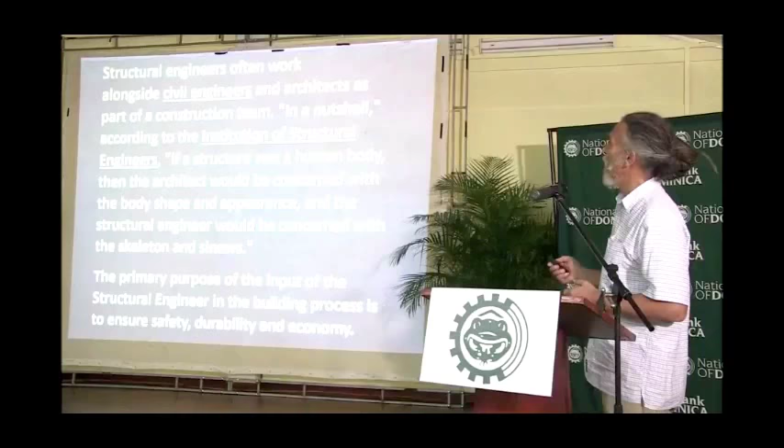So a comparison is given here. If a structure was a human body, the architect would be concerned with the body shape and appearance, and the structural engineer would be concerned with the skeleton, the bones, and the muscles that make the building stand up and withstand whatever push, whatever shove, whatever else comes on it. You don't want the building to fall down. The engineer is the one that will prevent it from doing so.

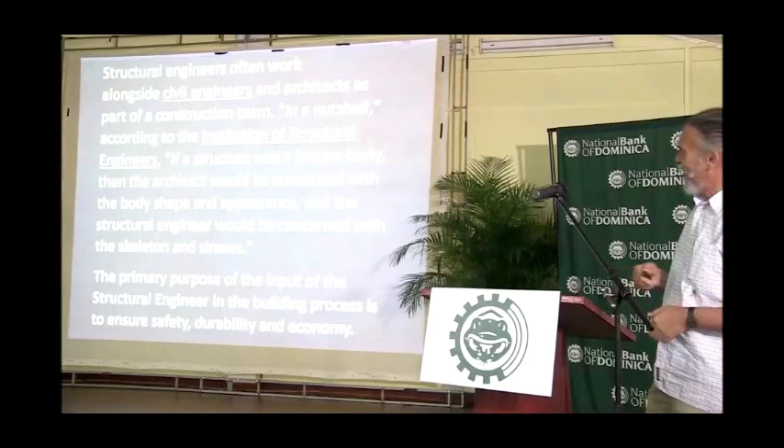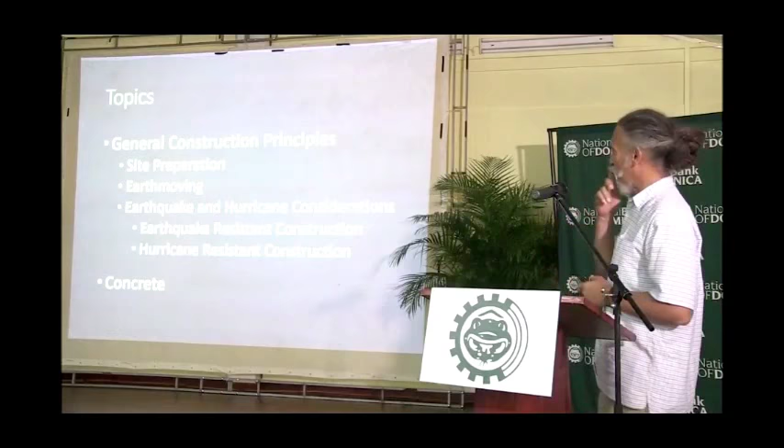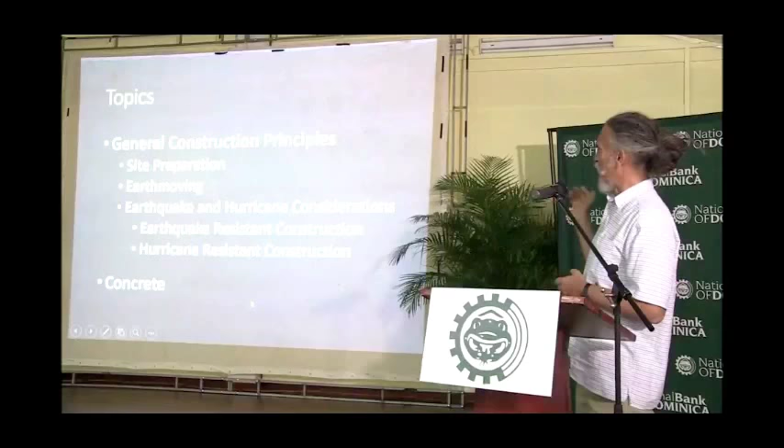Now, in this presentation, time is short, so I will just go through certain topics that engineering is involved in the whole process. We have the site preparation, we have earth movement, we have the considerations for earthquake and hurricane, and we will touch briefly on concrete.

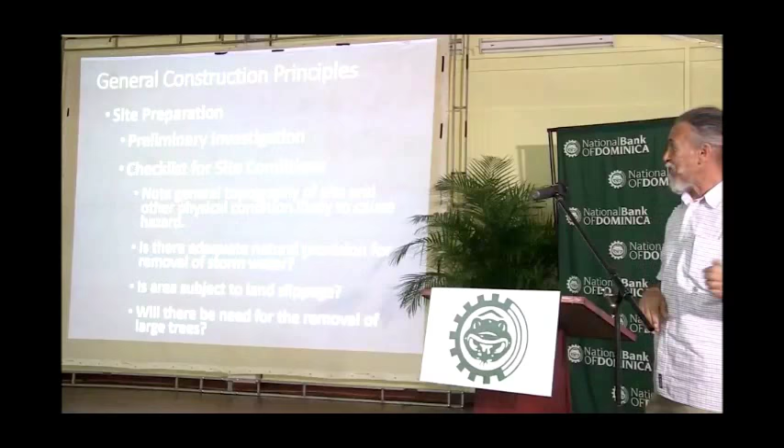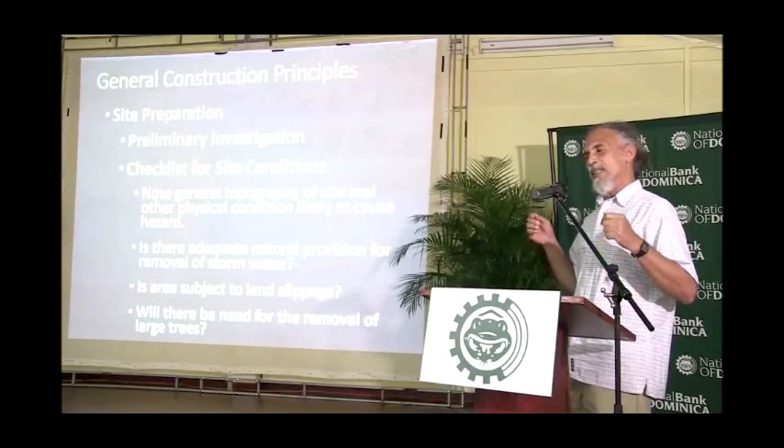Site preparation. Now, usually the engineer or the architect comes into the picture after the land has already been bought. So we have to make do with that situation. When the client is ready to start building the house, he engages his architect. He may not necessarily engage the engineer at that point, but it would be useful to have an engineer look at the site prior to building, or prior to even designing the building, because one has to take into account the nature of the soil.

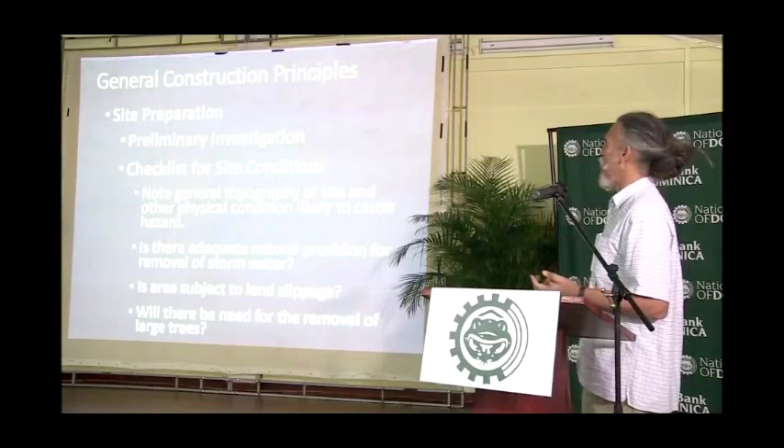...the nature of the topography of the land, whether or not you have any risk in terms of storm water, that is rainwater running through the site, whether or not the soil is strong enough to support a building, whether it requires retaining walls, whether or not the land is prone to slippage.

We also want to find out if it's suitable for septic tank and soak away if it is out of the urban area. We want to know where the land drains to, if that is an issue. So all that impacts upon the design of the building: how big the building shall be, how tall you can go, how wide you can go, as the case may be.

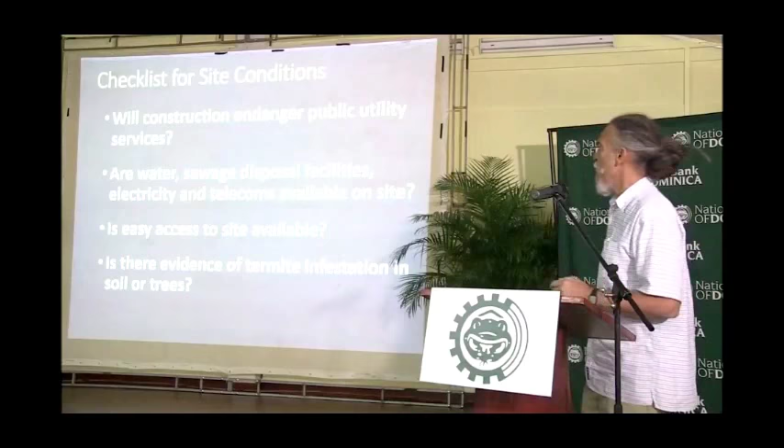We also want to know if you have easy access to the site, if you can drive onto your site, if your vehicle can come and drive underneath your house or next to your house, or if you have to leave it parked by the road. All these things you need to know up front.

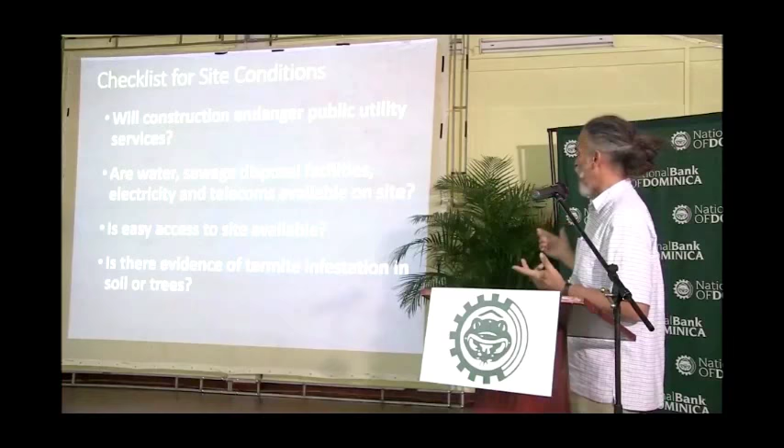Is there any evidence of termite infestation? That is a major problem in all tropical countries. Termites are part of life, but we want to know if there is any evidence of intense infestation within the property. As I say, I'm trying to go through as quickly as possible and touch on all the major points.

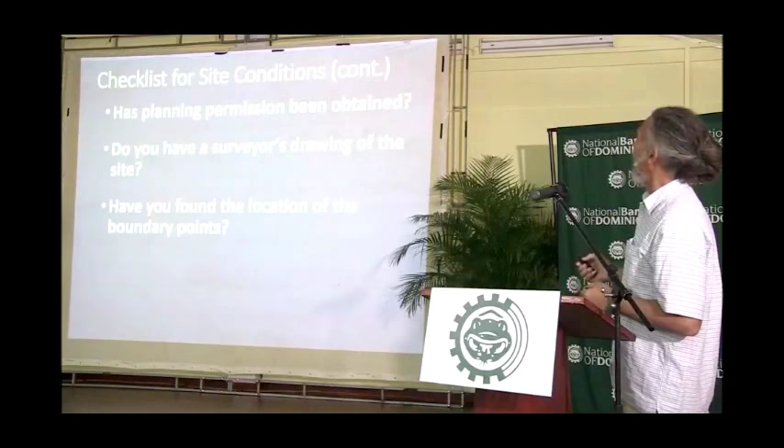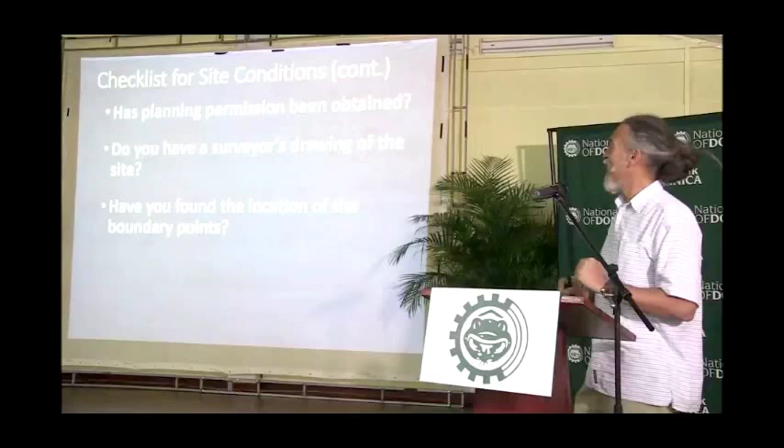Also, if you have a surveyor's drawing of the plan of the property, that's very important to know where the building shall go. And if you're not building on somebody else's land, as has happened in the past, you also want to know where the boundary points are, so the building will go where it is intended. Of course, planning permission should also always be obtained. The bank will require that as part of the documents required for processing the application.

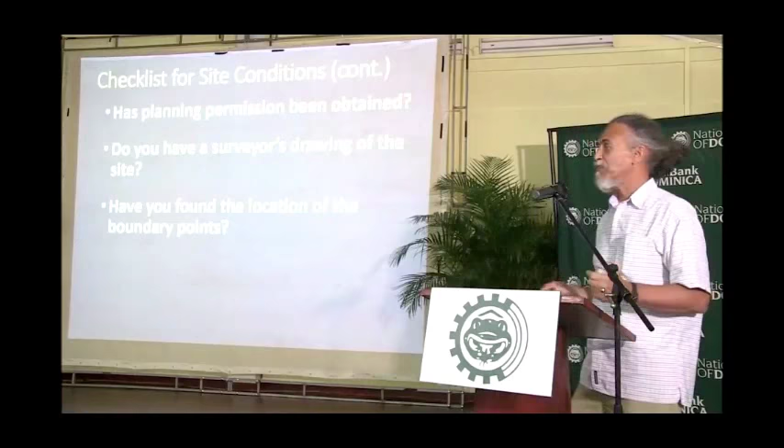Now we have to look at site clearance.

After the plans have been prepared, or during the course of preparation by the architect, there are some situations where the engineer and architect have to work together. Planning has requirements for official collaboration between the engineer and architect. These criteria depend on the size of the building. If the building is more than 3 stories, you require an engineer's certificate. If the spans of the slabs are beyond 13 feet, you require an engineer's certificate. If the span of the beams is beyond 16 feet, they require an engineer's certificate.

But that is just a document required for planning. It does not mean that if it doesn't meet those criteria, you cannot make use of an engineer. An architect or draftsperson is not trained in engineering, or has limited training in engineering. So while they may have the knowledge to make a building safe in terms of design, it may not necessarily be economical. That's where the engineer comes in—he can prepare a structural design that is both safe and economical. That's the important part, because anybody can build a very strong building, but you don't want to spend 100,000 when 50 will do.

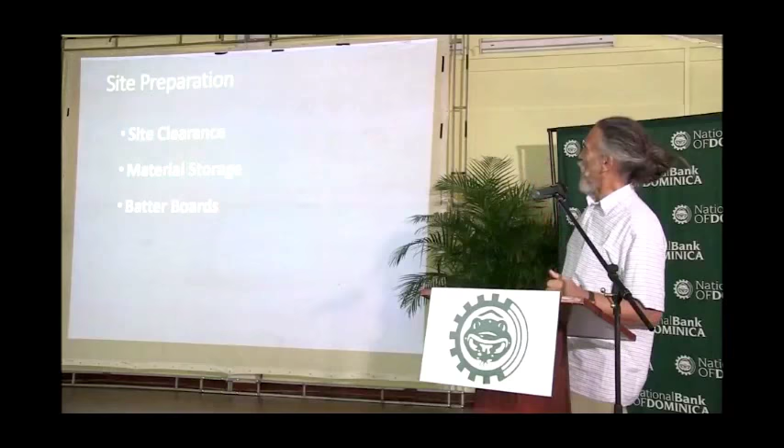So we have excavation. If it's not too deep, we do not need anything to hold up the sides of the soil. If it's deeper than a certain amount, especially in Roseau, you might need things to hold up the soil because it keeps falling in. It all depends on the nature of the soil at the respective site.

Backfilling—after we dig, we have to put back. Particularly for ground floor slabs, which I call a slab on grade, we do not want more than 3 feet of fill underneath that slab. Many times it's quite common practice here that they build the foundation walls, fill up the space, and just compact the top. That is not good practice. To do backfilling properly, you're supposed to fill it in layers and compact each layer as you're coming up.

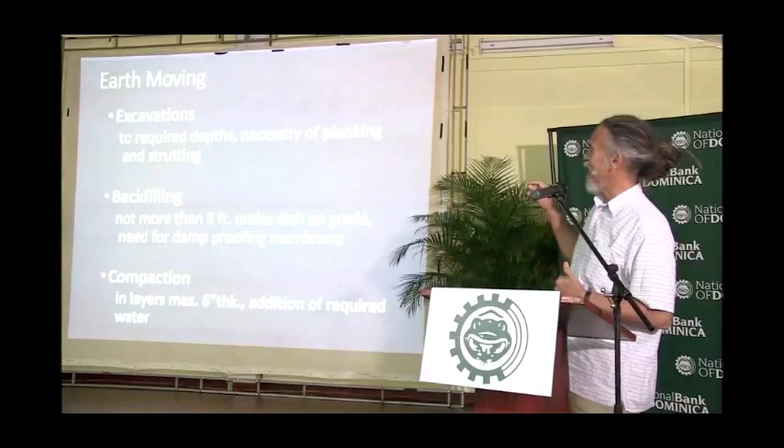Because over time, that more than 3 feet of soil underneath the slab will sink. And because the slab has not been designed to be suspended, it will sound hollow, start to sag, the walls will start to crack, the doors won't be able to close, and you'll get all kinds of problems associated with that. So if you can avoid fills of more than 3 feet, please do, or ask the designer to design your slab as if it were a suspended slab.

That's why I talk about compaction. Soil does not have any strength without compaction. Compaction is a tedious process, but the only way to do it is in layers, maximum 6 inches, compact it well, add water—the correct amount, because too much makes it too soggy, too little and it will never compact enough. This is a very common mistake or shortcoming during construction in this country.

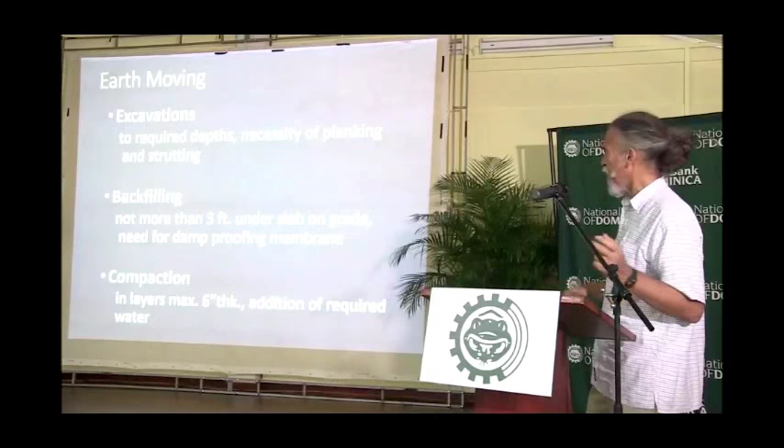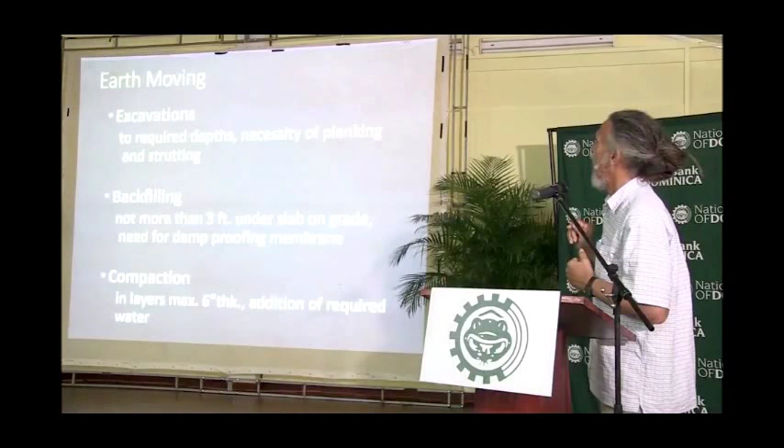Anyway, this part of the world is known as an earthquake zone. I think we missed a couple of slides, anyway. Alright, okay, we'll take it as it is.

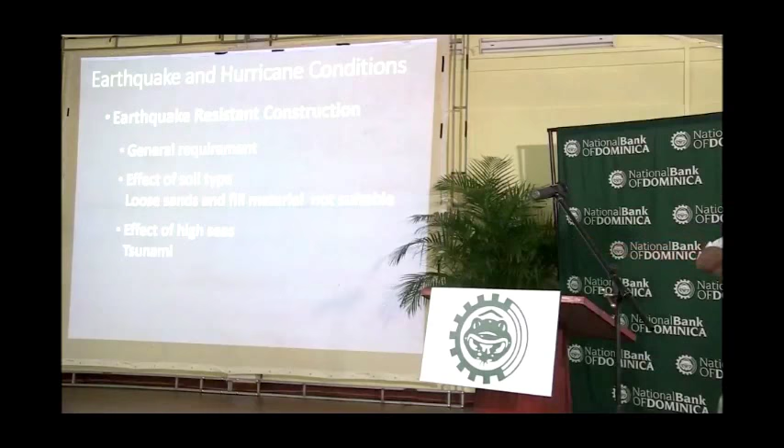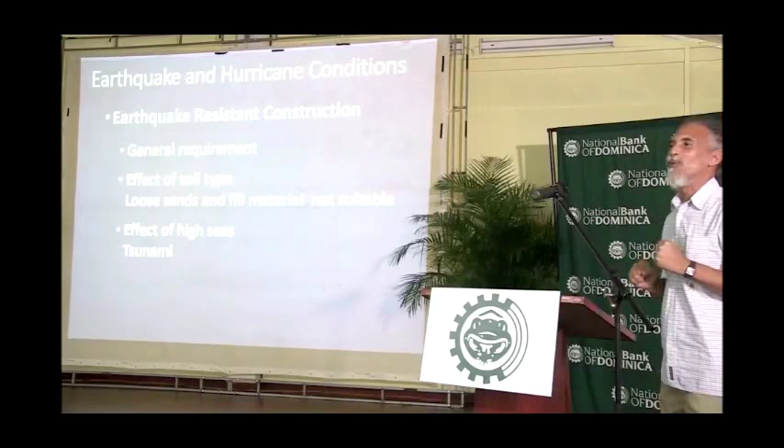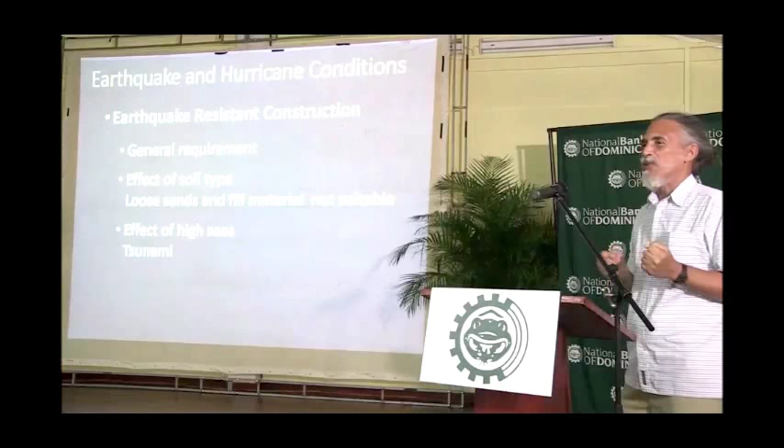Earthquakes involve the shaking of the ground to which the building has to react. This shaking could be both horizontal, in any direction, and at the same time up and down. So it is a difficult thing to design against. Nevertheless, there are certain points that we must bear in mind when looking at making our houses and buildings earthquake resistant.

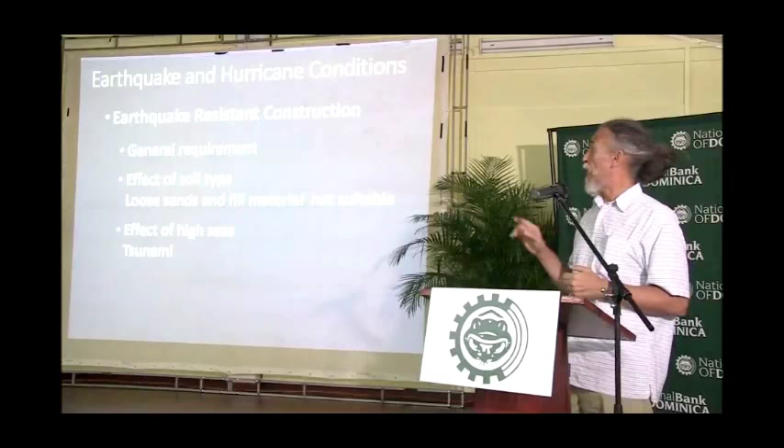Fortunately for us, most residential buildings are one or two floors, and they're not as affected as taller buildings would be. Nevertheless, the type of soil that the building is on is very important. If you have loose material on which the building is placed, the whole building could end up toppling.

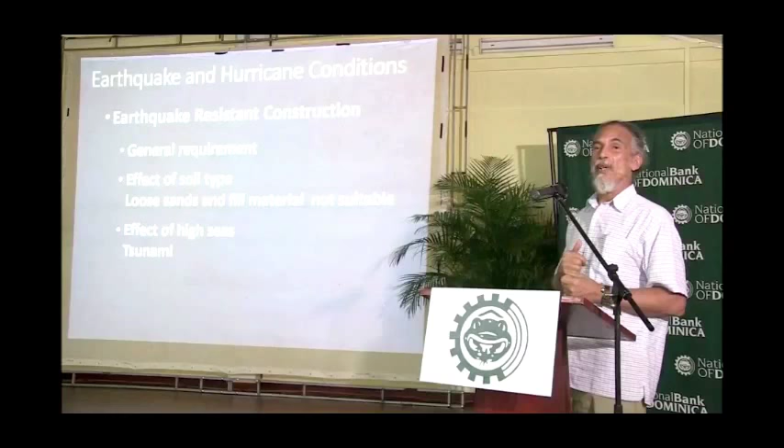Also, if the building is close to the sea, you have the issue of tsunami. Just recently, there was talk about this volcano offshore in Grenada, called Kick 'em Jenny. It has been active for some time now, and it's expected that sooner or later it will explode. When that happens, because it's in the sea, it's quite likely there will be a tsunami generated, and there's no barrier between them in Grenada and Dominica, so it's expected there will be some tsunami effect.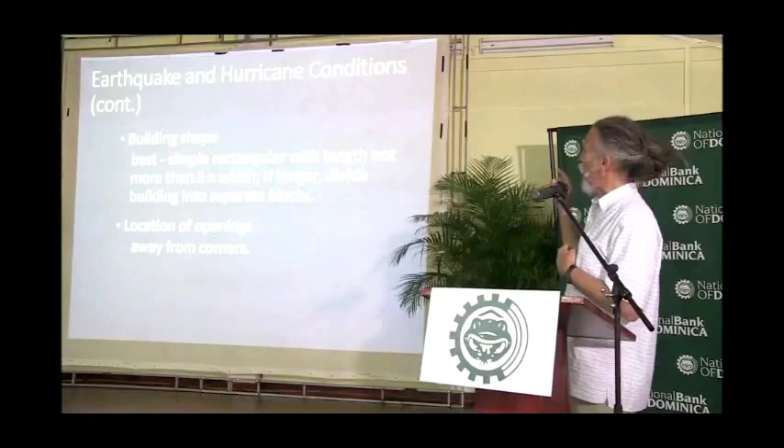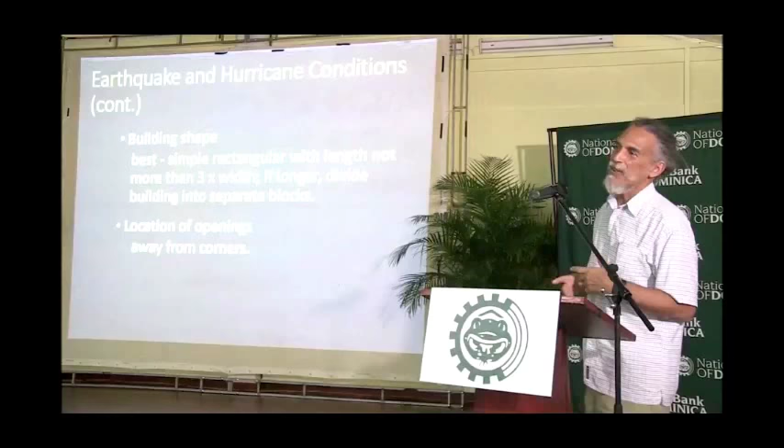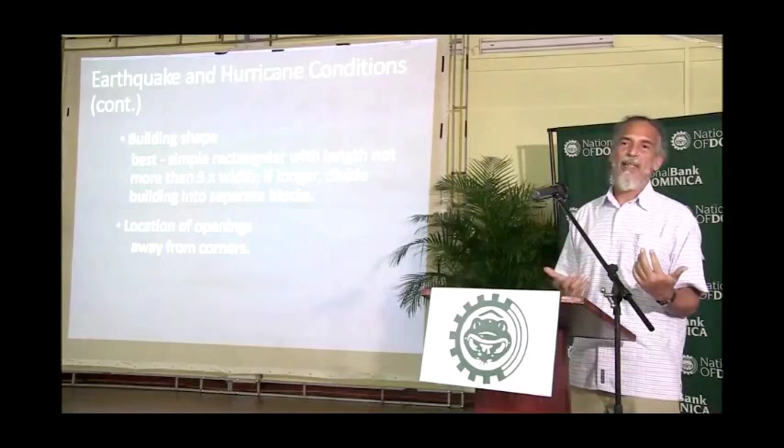Also, the shape of your building is important in terms of how it resists the earthquake. The best shape is a simple rectangular shape with the length not more than three times the width. So if the building is 30 feet wide, it shouldn't be more than 90 feet long. If it's too narrow a building, when the ground shakes, it's more likely that it will have some damage. If it is longer, we've got to divide it up into separate structures, so that with the movement you don't get any kind of damage occurring.

The openings must also be situated away from the corners of the building. Bringing it too close to the corner weakens the building and therefore makes it more susceptible and more vulnerable to earthquake damage.

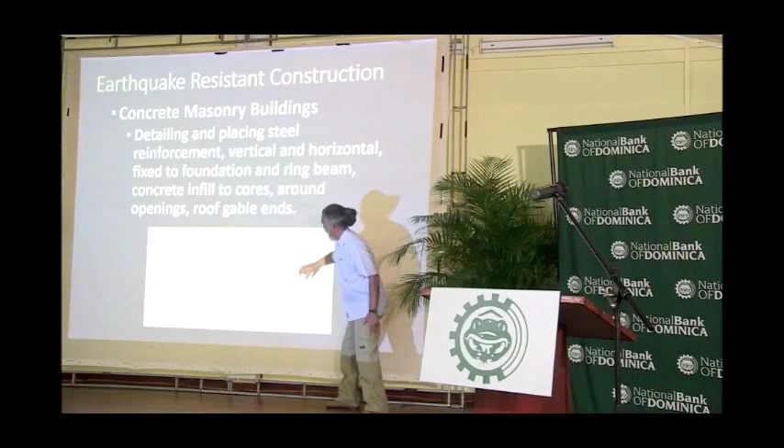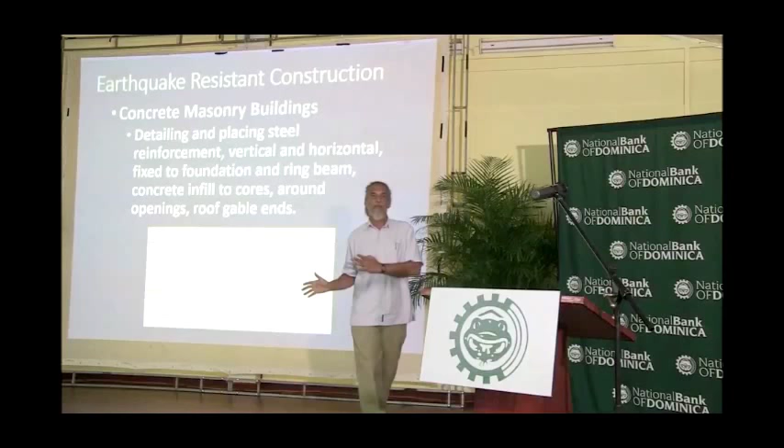Because there are holes in the block which are filled with concrete and steel as well. Not every core, but below ground level every core is filled with concrete. Once it gets above the floor level, you have steel running through, and that same core has to have concrete. But if it doesn't match up the way through, you get a discontinuity in that concrete core, and the wall will never have the strength it's supposed to have. So although you have everything it's supposed to have, because it's not placed properly, the wall is not as strong as it's supposed to be—purely because the mason decided it's easier to put the block any old way than to place it in this fashion.

Also, the steel must be continuous from bottom all the way to top, so that the wall is held both at the bottom and at the top. So when the building shakes, the wall doesn't fall down. That's what you're trying to prevent.

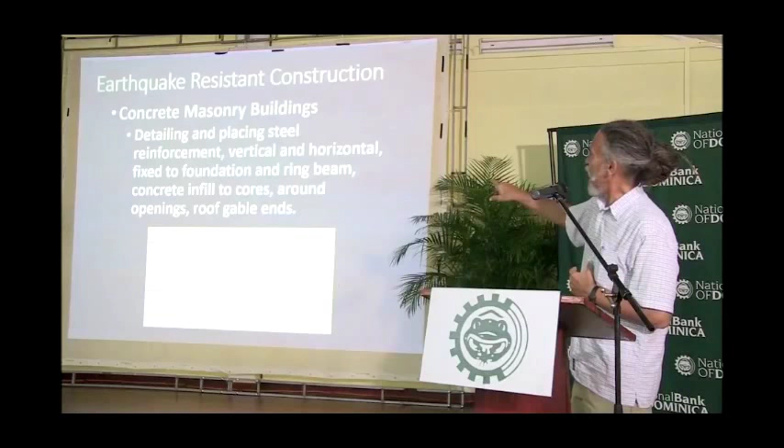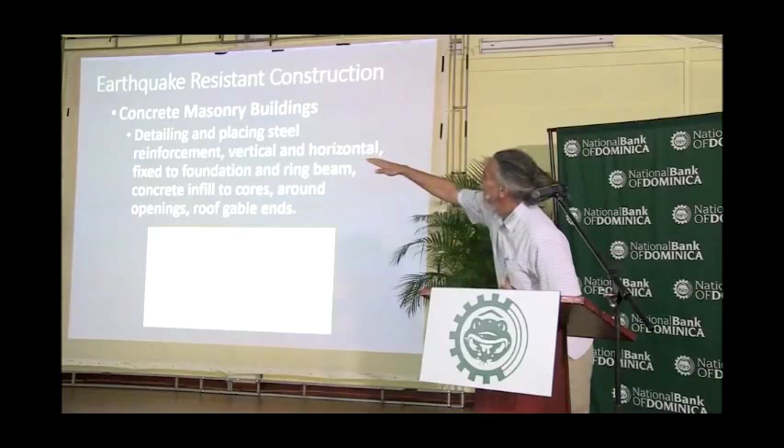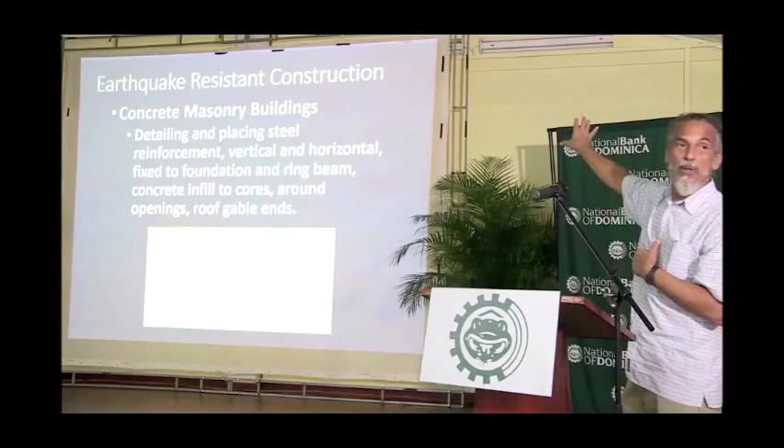The gable ends, like you see at this end of the building—this part up here, between the horizontal member and the roof, that set of block work—many times the blocks are just placed there without any steel in them. And there's no beam running on the sloping side of the wall, on the top. They have a beam at the horizontal level, but it doesn't also go up to tie that triangular piece of block work. Many times they just put the block work to fill up the space between the beam and the rafter. But that is a weakness in the house. When the house shakes, that little piece of wall comes down on somebody.

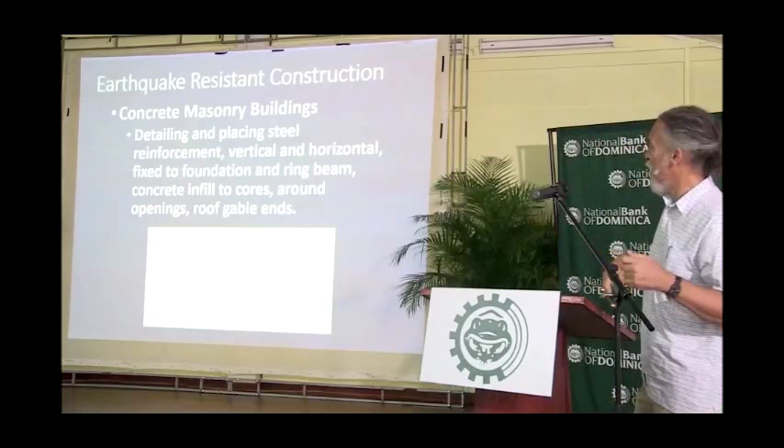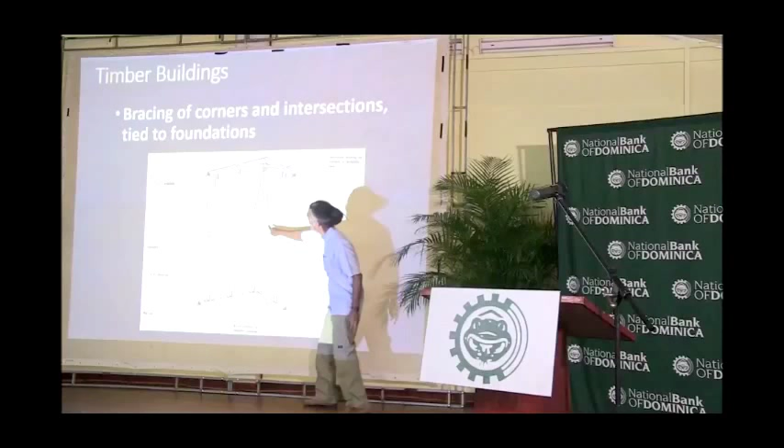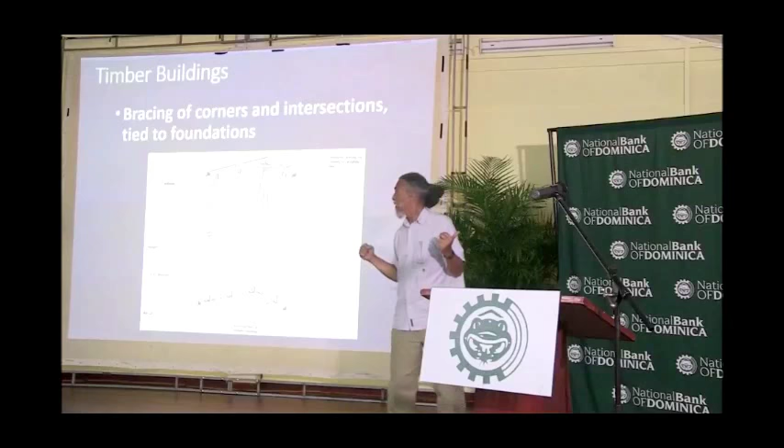In a timber building, you have to have bracing. This is the bracing, also across the top. That will prevent, when the ground is shaking, that the building itself will stay intact. Without those members, the building will fall apart.

These are some illustrations of what happens when you have very powerful wind. Of course, this wouldn't happen, hopefully, in a concrete building, but in a wooden building it would blow it off. The roof, the windows, and the doors are the most vulnerable parts of a building when it comes to high wind.

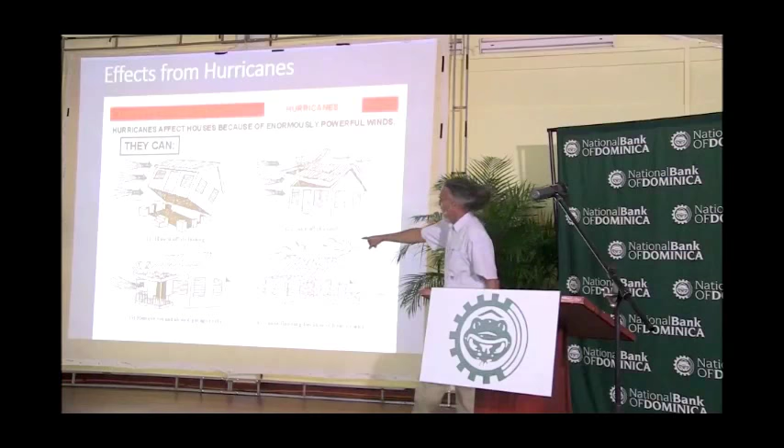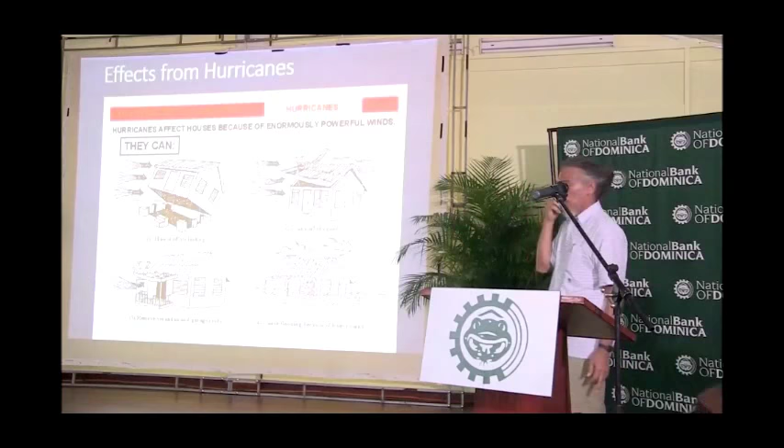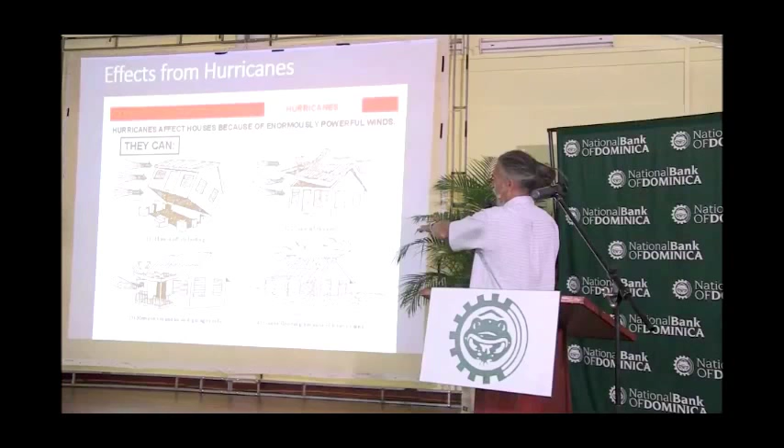You have issues where the veranda is separated from the main building, but the roof is one continuous roof. The roof, because it covers an open area, is very susceptible to blowing off. And if it's attached to the main roof, it could quite easily damage the main roof where everybody is sheltering.

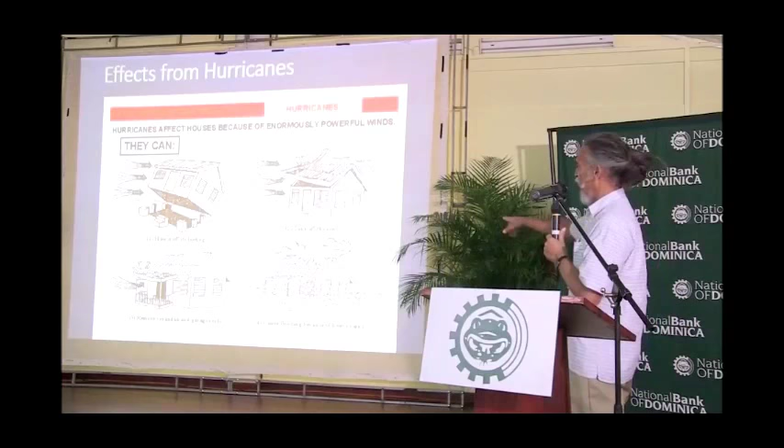The last one, flooding, of course. We all know about what can happen, not only from flooding in that situation, but also landslides arising from torrential rains.

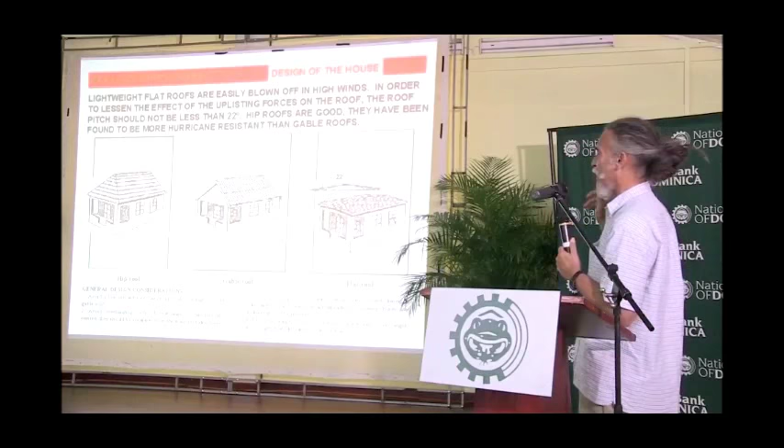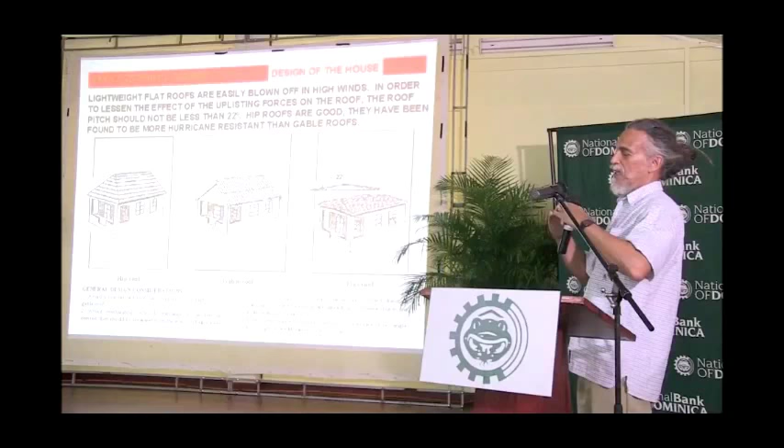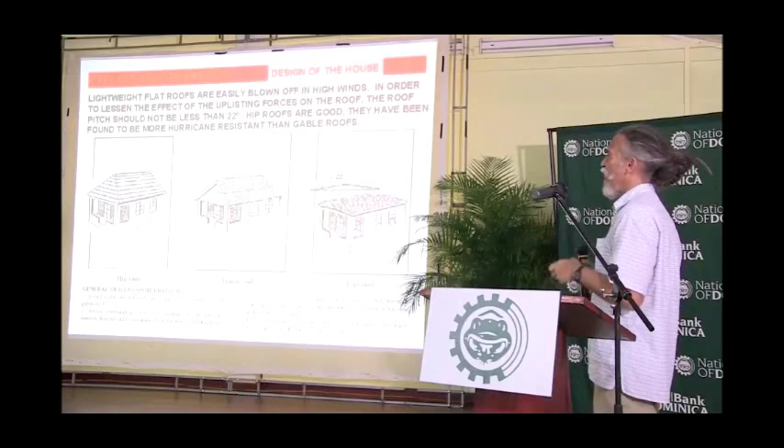The angle, what you call the pitch of the roof, should be not less than 22 to 30 degrees. Not less than—it can be more, but not less than. This is because as the wind passes over the roof, it tends to suck it out. And if the pitch is too low, the suction is much greater. With a steeper angle, the suction is kept to a minimum, so there won't be so much force sucking up the roof.

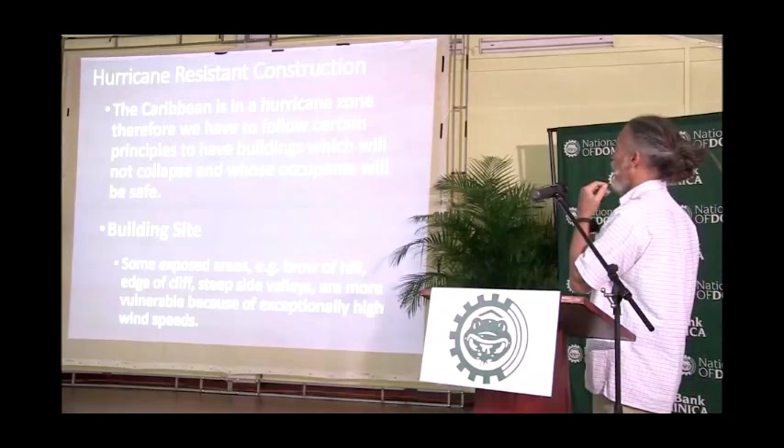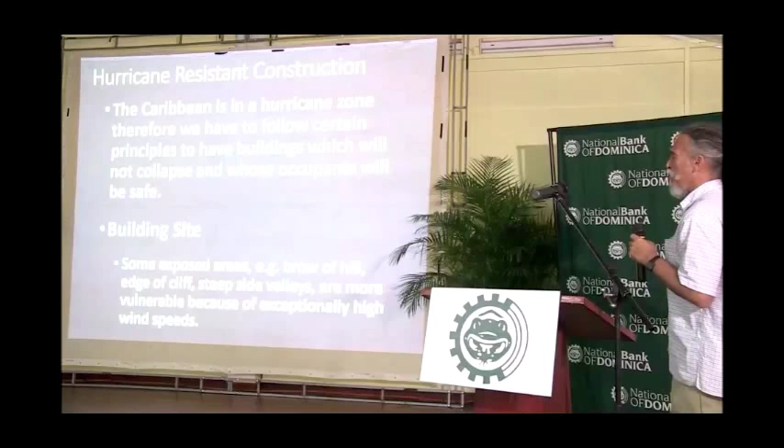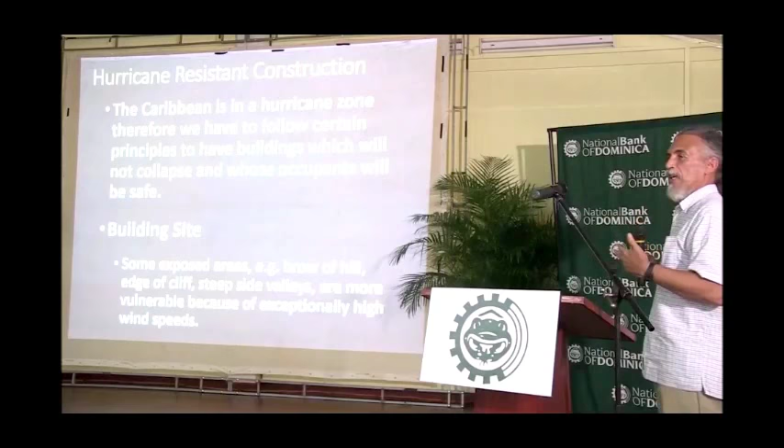Also, the building site, where the building is sited, the location of the building. Depending on the topography of the land, some areas are subject to much higher wind speeds—for example, the brow of a hill, the edge of a cliff. In those locations, while somewhere it might be 100 miles per hour, in those locations it might be 150 in the same hurricane. So when houses are situated in those areas, one has to bear in mind that the wind will be higher, so therefore you have to make it that much stronger. I'm not saying you cannot build there, but just be aware that it's highly vulnerable to wind, so we need to make it much stronger.

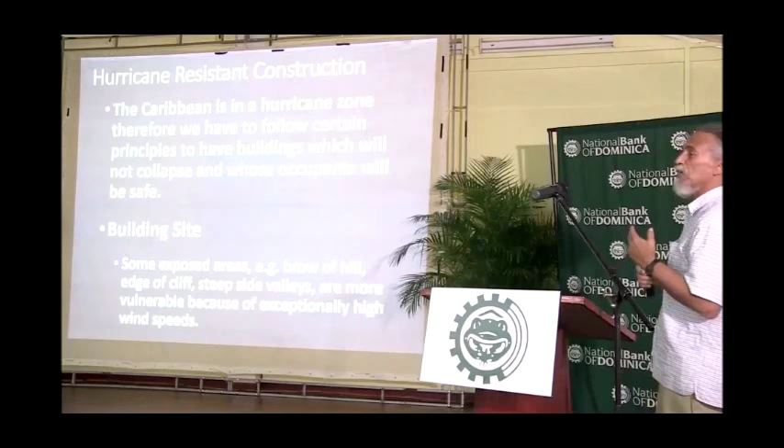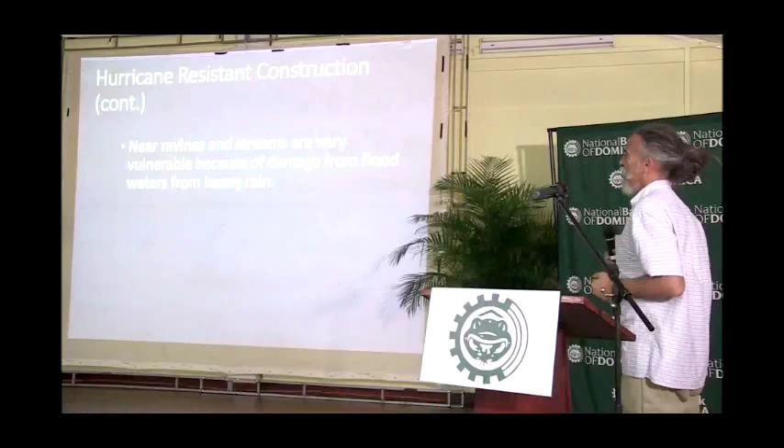Of course, ravines and streams—building close to them puts you in a vulnerable state because you don't know how high the flood waters will come, given our recent experience with Erika, where streams that we have known to be little things all our life became monsters during Erika. So we must give all ravines and streams quite a lot of respect because we've seen what has happened.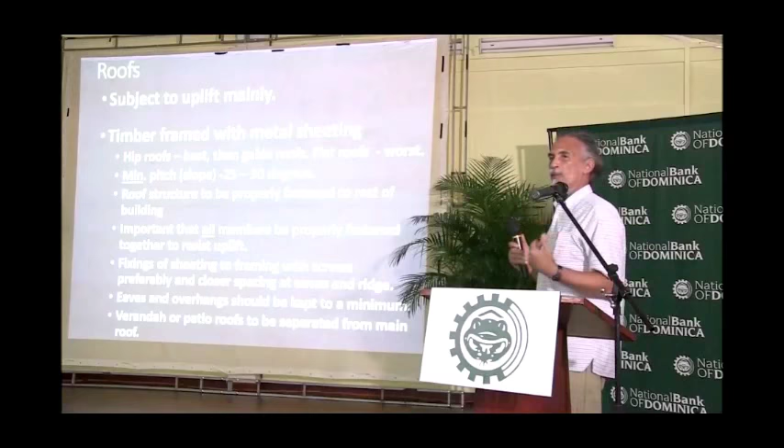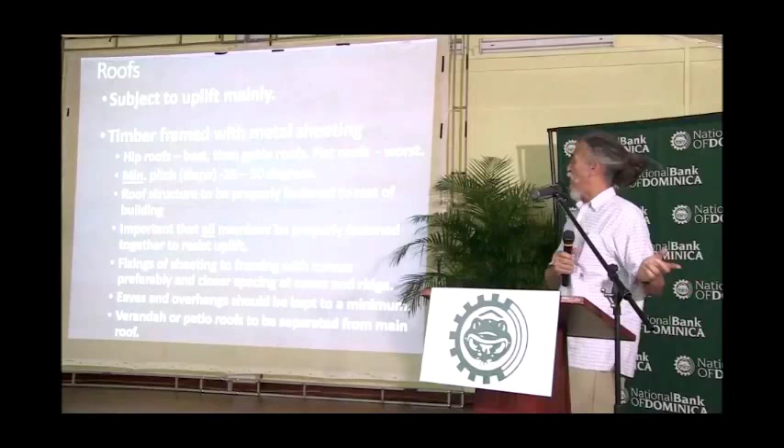Yes, just to go over the roofs. So in the course of your discussions with your architect, who would be the ones mainly involved in those type of things, these are issues that you can be aware of, that you can ask him—make sure he does it this way and that way. And if he does it another way, ask him well, why he did it that way. Because you're the one going to be living in the house for the life of the house, so you want to make sure that you are safe inside of that house.

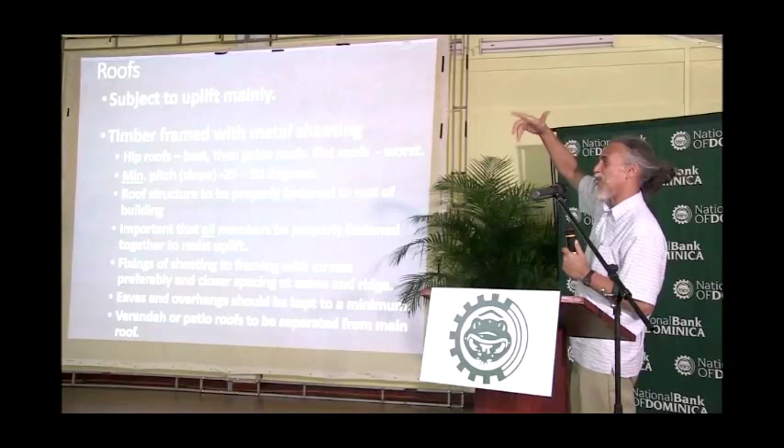All the members, of course, everybody knows about hurricane ties, tying down the rafter to the plate, or the ring beam as the case may be. But apart from the rafter to the plate, we also need to tie the purlin, which is the member that the galvanize is attached to—also tie it, prevent it from coming apart. It's not sufficient just to nail it.

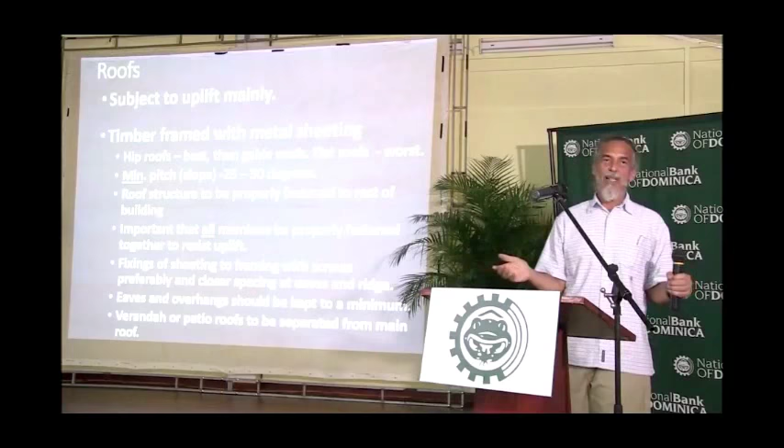What a nail can do, really and truly, when it comes to resisting uplift, it will prevent movement sideways, but it doesn't prevent it from coming apart this way. A man with a hammer can take a claw hammer and pull out the nail, much less for strong wind.

So we need to have something that will hold it down. Apart from the nail, we need a clip that will prevent it from moving apart like this. Many times they have hurricane ties, but they don't have the tie from the purlin to the rafter. So the wind will come and take the galvanized together with the purlin, leaving you with the rafter, which defeats the whole purpose.

You don't want anything to go, because it's you inside there, and your property and everything else. The sheeting has to be tied down, or better, screwed down to the purlins.

Because the suction is greater along the edges of the roof and at the ridge, you want closer spacing in those locations. Sometimes as much as every corrugation, you have it screwed down, because the screw is harder to take out than the nail.

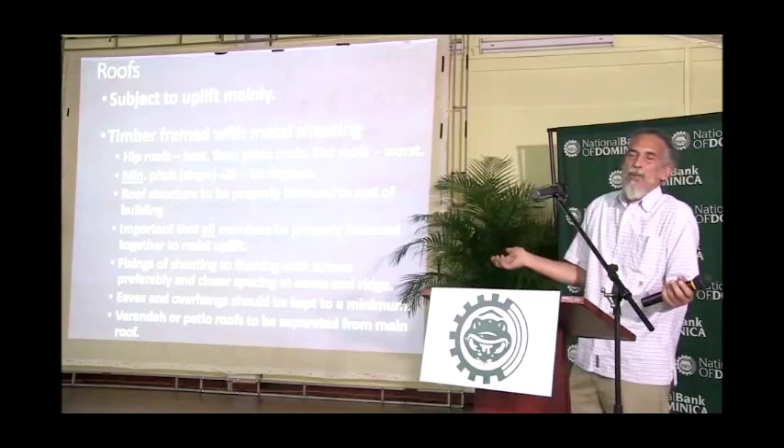This business about nailing galvanized, that thing is fast, because that doesn't have much resistance at all. So, the screws are available, and the tools are available to implement all of that.

The amount of overhang that you have over the edge should be kept to a minimum, because the longer it is, the easier it is for the wind to pass and help take off the roof.

The veranda and patio roofs, like I mentioned before, you should keep as a separate roof. It's not part of the main roof. It should start under the roof for the undereave. So when it does go, which is quite likely, it wouldn't affect the main roof.

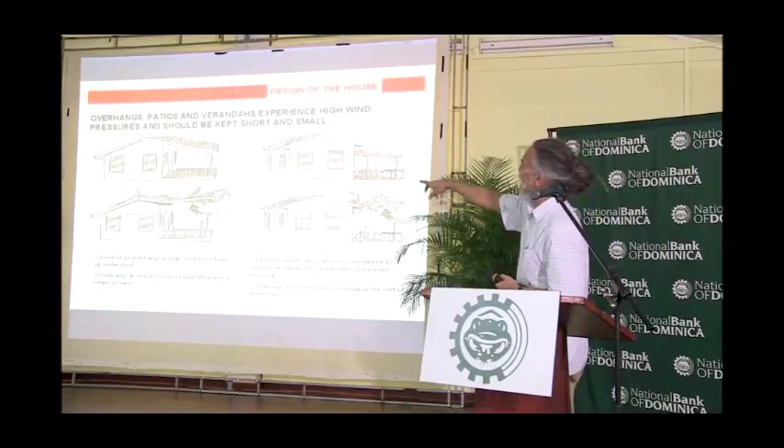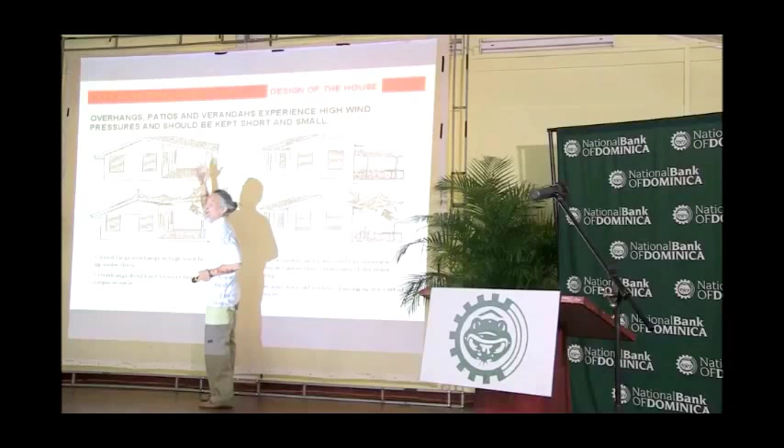Similarly, you see an example when the roof of the veranda is the same, an extension of the main roof. It's quite easy for the wind to come and kick it off, and then it affects the main roof. So it's much better to have a separate roof, so even if it goes, the main roof still remains.

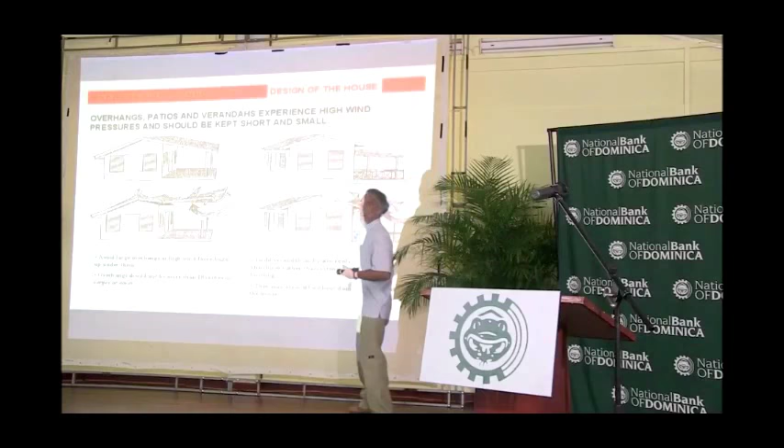Let me see what else we have there.

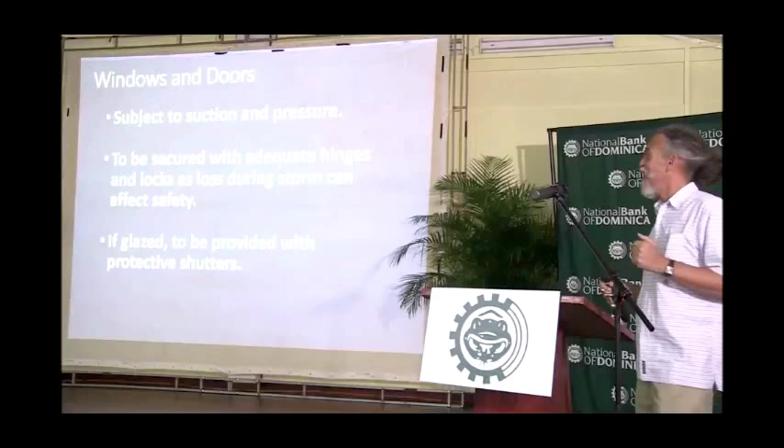Windows and doors, of course, we have to make sure that they're secure because they can also be affected. We have to have enough hinges on our main doors to make sure that they are secure. If they are glazed, that is, if they have glass in them, we have to provide them with the necessary shutters to prevent breakage.

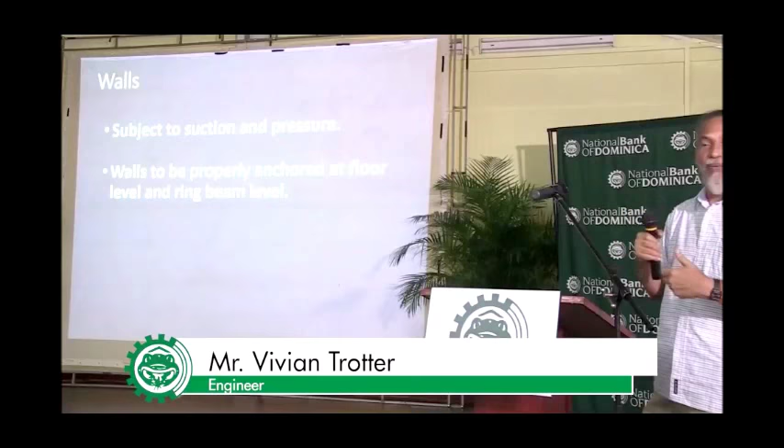The walls, of course, are subject to suction and pressure. They don't usually fail, but given the way some of those walls have been built, I cannot say that they wouldn't fail, because if they didn't put the steel the correct way, and didn't align the blocks properly, it's quite easy that the wall could fall in, or suck out, as the case may be.

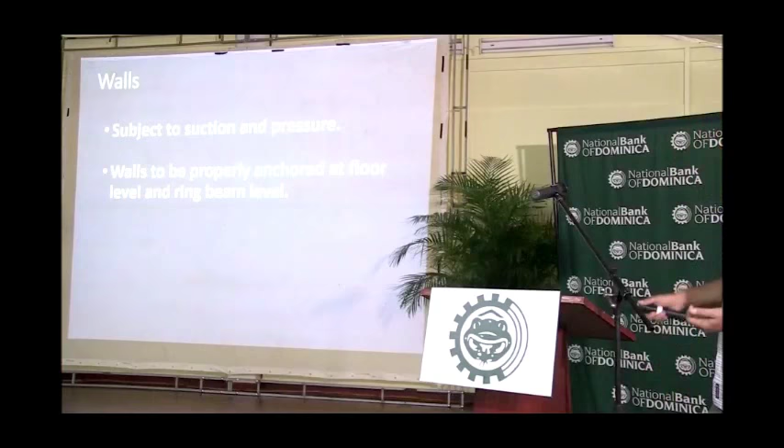Of course, it has to be tied down at the bottom, the steel has to come from the floor and end up all the way in the ring beam to make sure that the wall is secure both top and bottom. In addition to that, quite often the masons leave that out, we need horizontal reinforcement.

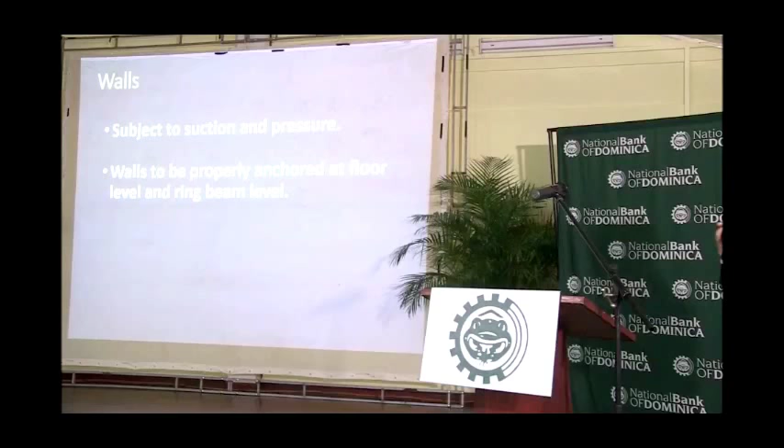Every third row of blocks, there's supposed to be another layer of steel in the joint of the block to tie the blocks at the end. So the wall is tied top, bottom, and sides. And in that way, the wall is made secure.

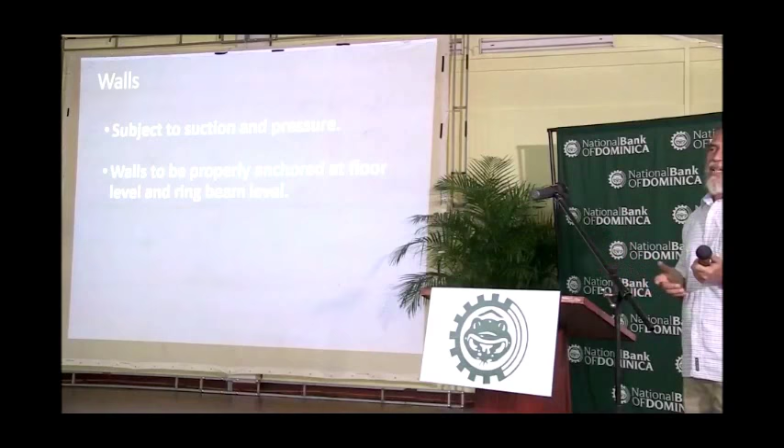It's because we live in a hurricane and earthquake zone that we have all these extra things to put in. If Dominica wasn't in those locations, some of those things we wouldn't need to put in, because the loads that the building would be subject to would just be what we call gravity load, the everyday type of load. Like us sitting down here, that's gravity load, you know?

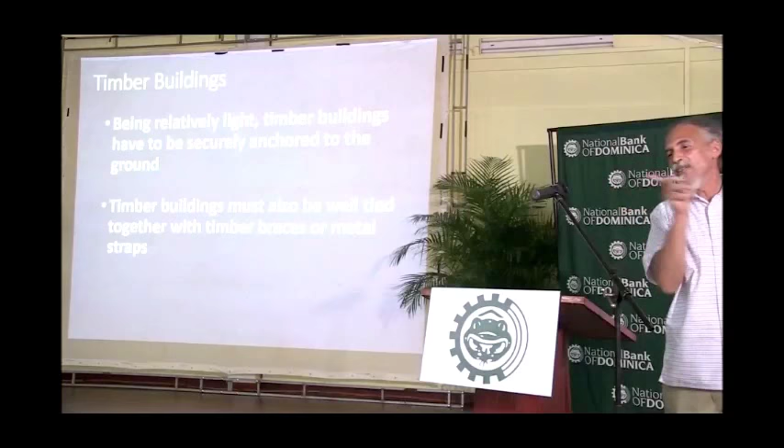But hurricane and earthquake are what we call lateral loads. The loads come from the side. And if the building is not reinforced or designed to take those loads that come in on the side, of course the building will be affected.